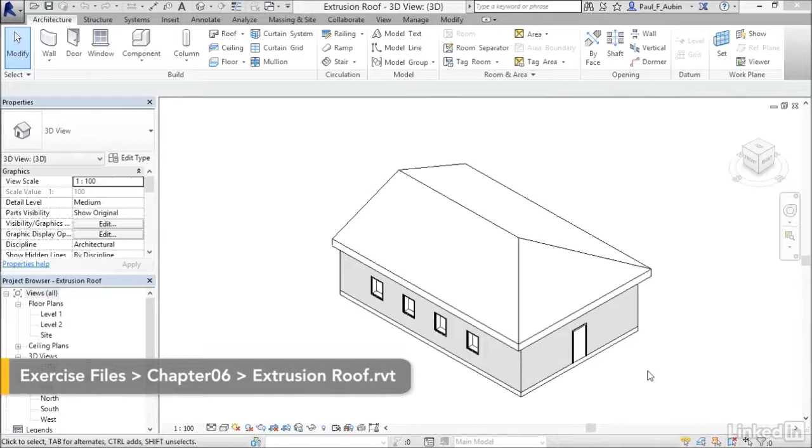When you want to create traditional form roofs like gables and hips and shed roofs, the footprint roof is the easiest way to do that. But we also have an extrusion roof, and that can be useful for things like barrel vaults or curvy freeform roofs and so on. So in this movie, I'd like to look at an extrusion roof.

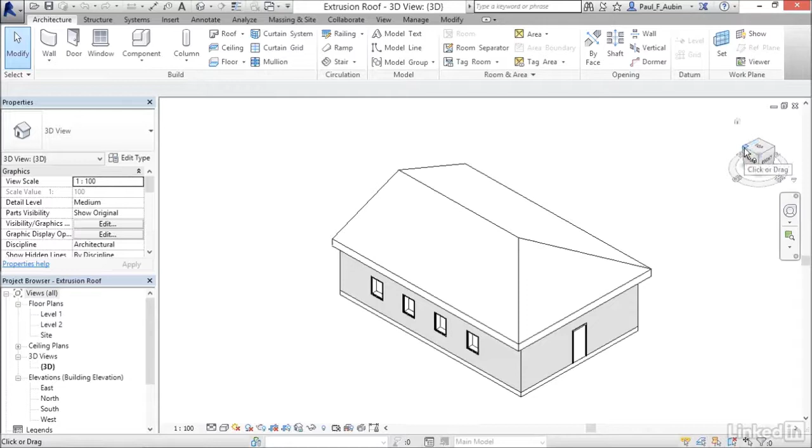I'm going to build a small roof awning over a patio on the other side of this building. To rotate the building around, I'm going to use the view cube. If you come over to the view cube, you'll notice there are hotspots that highlight as you move your mouse around. I'm just going to access this corner and click it, and that will spin the model around to match that orientation.

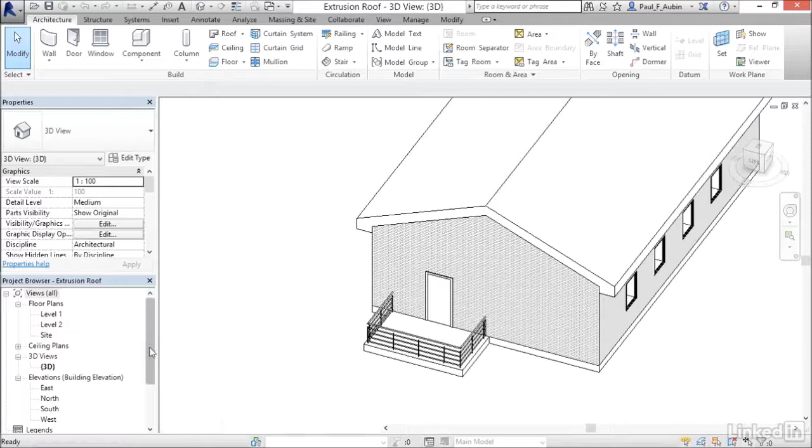Now if you want to zoom in and orbit, you can fine tune, but the view cube can roughly spin you around to that orientation to get you started. Let's say we wanted to put a little awning roof right here. The best way to do that is to work in elevation. This is the west side of the building, so I'm going to double click the west elevation. Now we're looking right at that plane we saw in 3D.

Let's zoom in just a touch. The first thing we need to do with an extrusion roof is set what Revit calls the work plane. So I'm going to come over to the Architecture tab, click the drop down next to Roof, and choose Roof by Extrusion. That's what it's going to ask me to do - that first question is going to be establish the work plane.

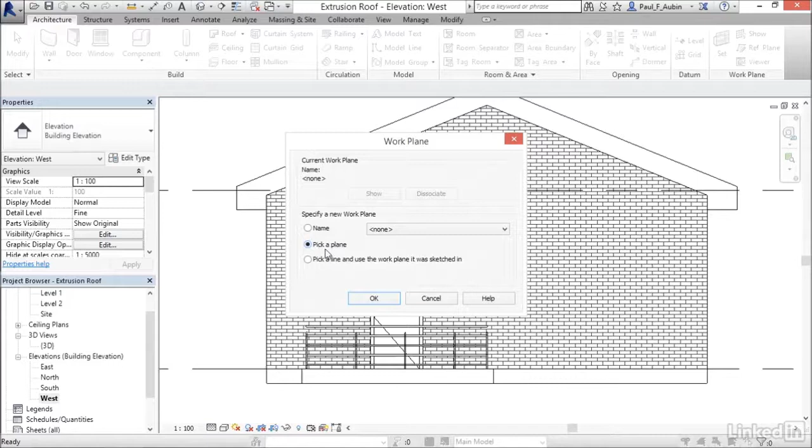The work plane is simply the plane that you're going to draw the sketch on. Like other objects we've created in this chapter, this is a sketch-based object, and we have to sketch the shape of this roof on some 2D plane. I'm going to use the default option to pick a plane, since it's going to be easy for me to select the face of the wall I'm looking at and use that as the work plane. Then Revit will ask me what level I want to associate the roof to.

It really doesn't matter what you choose here, but since level 2 is my highest level, I'll accept that default. That puts me in sketch mode, and we can work with many similar tools we've already seen. I'm going to reduce the thickness of this roof to the generic 125 millimeter roof. Then here's the most important difference between this sketch mode and the others we've looked at so far: in this sketch, you're creating an open shape, not a closed shape. Let me show you.

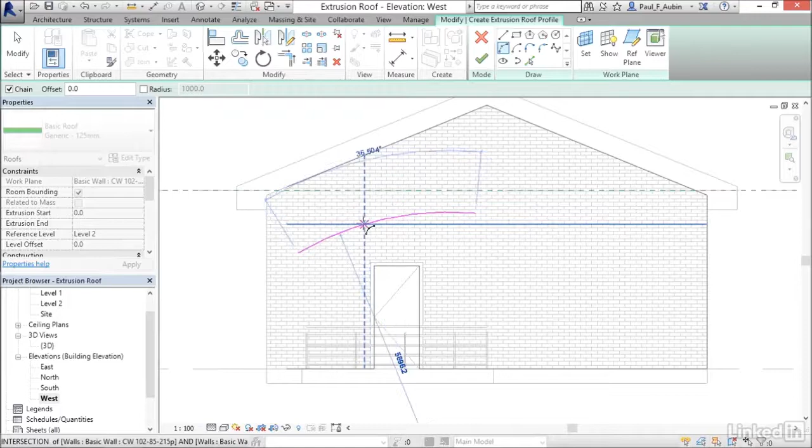I'm going to do something kind of curvy here, using start-end-radius. I'll start about there, go at a slight diagonal like so, and then a really shallow curve with the radius. Now I can continue adding points if I want - maybe another small curve like so and snap it tangent. However you want to do that, I'll just do those two shapes.

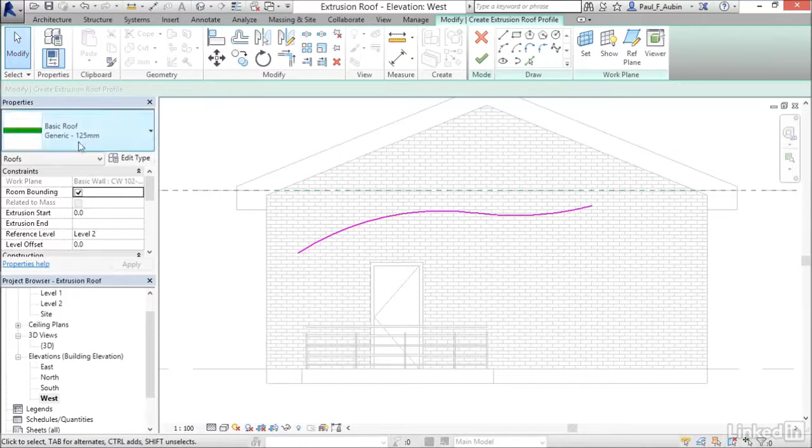Notice that I didn't wrap back around and close it on itself - this just determines basically the plane of that roof. When I click finish here, it's going to apply the type I chose, and notice it gives that roof a thickness based on the 125 millimeters. Now it looks a little odd here - it seems like something's a little wrong.

Let's go back to 3D and see what happened. By default, when you create an extrusion roof, it will use the depth of the building geometry for the depth of that extrusion. So it extruded right inside the building, pretty much the opposite of what I'd like. But it's really easy to fix this.

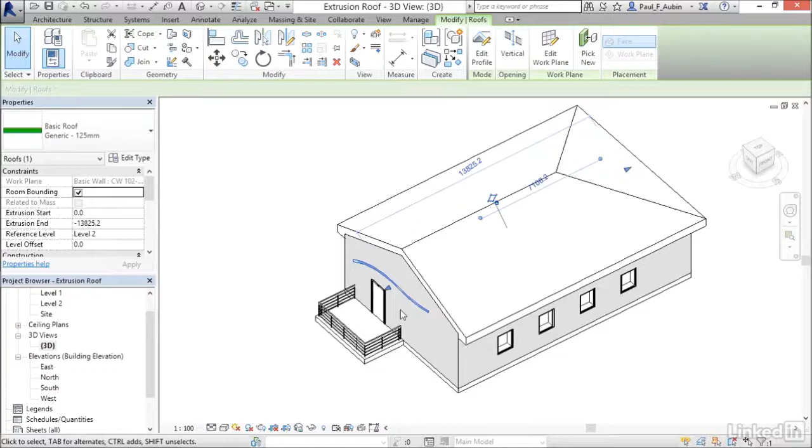Notice that there are some control handles at either end. So what I'm going to do is take this control handle and drag it out over the patio to about where I want it to be. Now you can orbit and make sure - that looks pretty good.

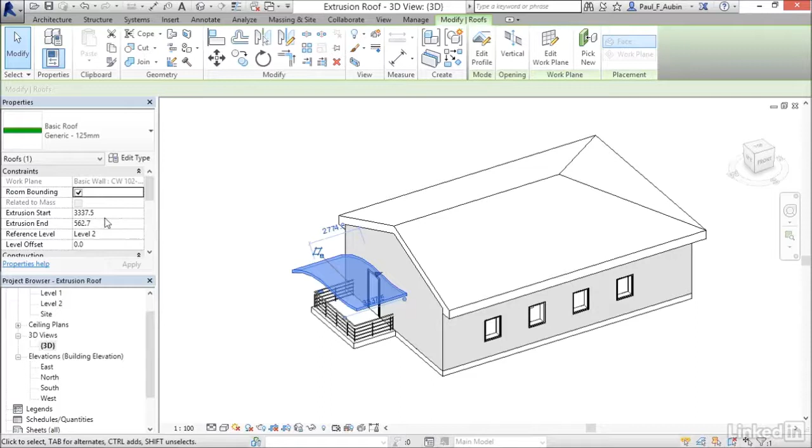Now, if you look here and see what that did, the numbers are somewhat random down to decimal points. Let's stretch this one here as well outside the building. I want to clean that up and round those off to more rational numbers. So in this direction, maybe I'll just do a nice even 3,000. When I apply that, it'll shorten it slightly.

And then in this direction, I could do the same thing, round it off to 550. But what I'm going to do instead - there's a gap right here - is make the face of that match the face of the wall. I can do that right here in 3D with my align command.

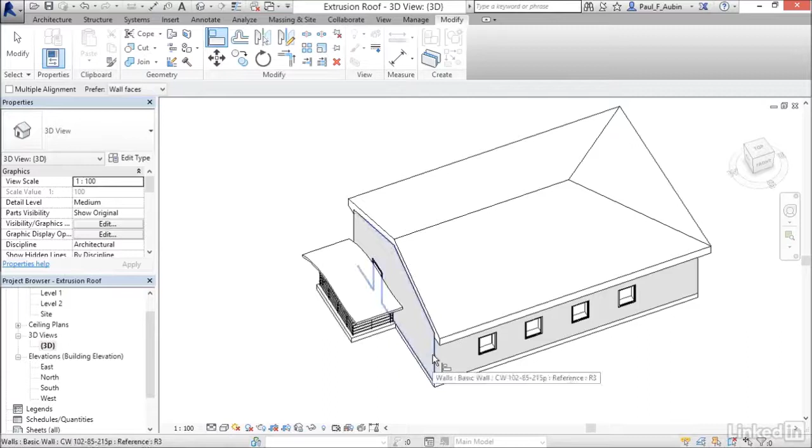So I'm going to select the face of the wall as my alignment reference, and then I can touch the edge of the roof and it will snap itself right to the face of the wall. So now when I click on here, you can see those numbers are very rational and it makes a little more sense. I just have a nice 3,000 millimeter roof there.

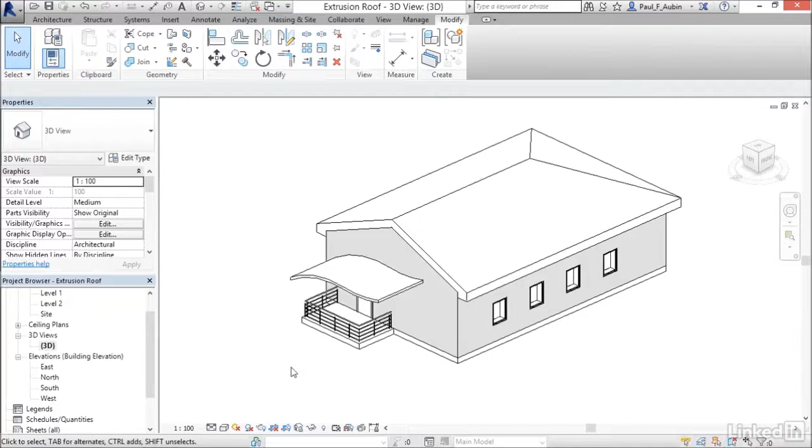So the extrusion roof is how you can create any of these free form or undulating shapes. It's a very easy tool to use - just work in elevation, sketch out the shape you want, and when you click finish, it gives you that nice extruded shape.